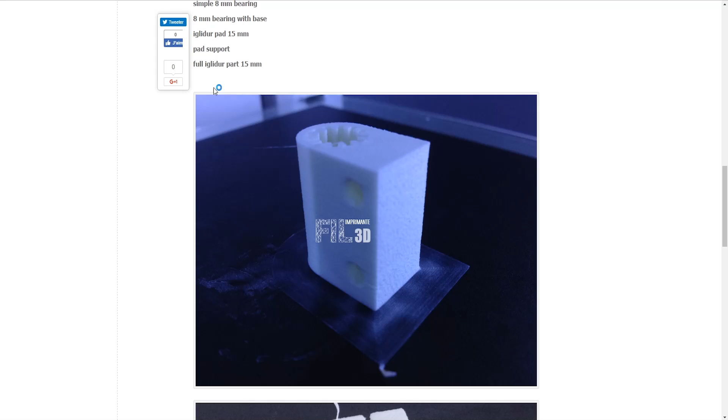They have excellent wear behavior, and most of the time when you print these, you're going to be printing at 220 to 250C, bed 110C. So generally around here, this one's giving in Fahrenheit, you'll probably be more familiar with Celsius. So excellent wear behavior, most of them do have that. Hard to process, outstanding wear behavior of the tribo filaments.

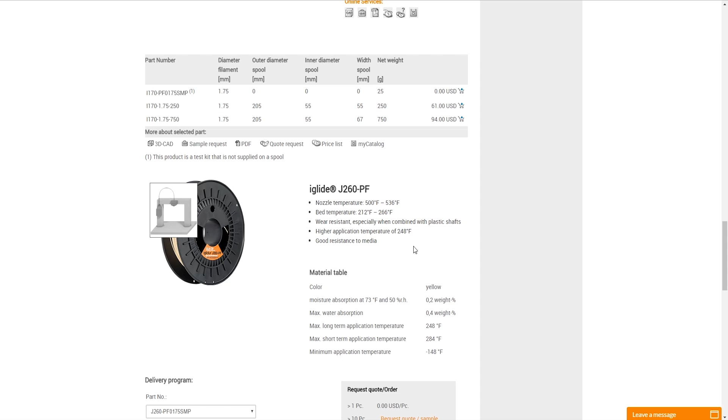Then you have good media resistance, the J260PF, nozzle temperature quite a bit higher. So this one's like an additional 54 Fahrenheit, which is like 10 to 20 Celsius increase. So this one might be harder to do. Bed temperature also very hot, 266, probably not going to be able to hit that with most beds. Great wear resistance, especially when combined with plastic shafts, higher service temperature that you could run it in.

So those are the few that they have. They have three, like I said, I have the 180, and this one I believe is the newer one. Okay, so I was not able to find the actual mechanical properties, well, I found two here on this page. I was not able to find maximum strain. I was also not able to find the stiffness.

But on this page, you can see that the flexural modulus is 1,000 megapascals, and the flexural strength is 44 megapascals. So if you guys were here from my last video on Taulman 3D, their nylon lineup of filaments, this one falls between PCTPE and nylon 645. It's almost got the same properties as nylon 645.

And also that I was not able to find a comparison between this and nylon. So I'm not completely sure how well this is more smoother than nylon, lower wear resistance. But I'm thinking that this is some sort of nylon. It's probably some sort of type of nylon.

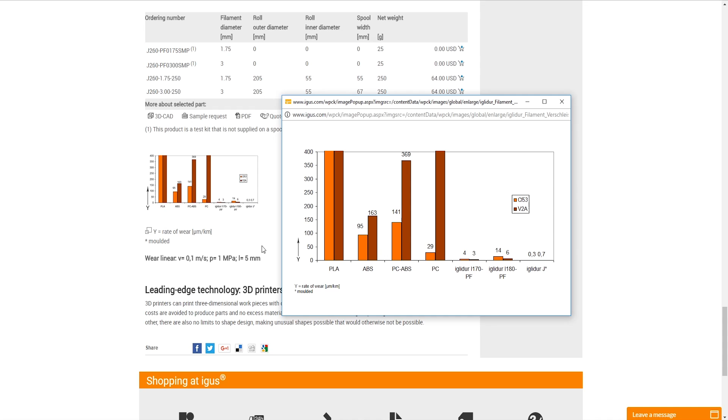There's a bushing, and there's another piece inside the bushing. So that's the linear test. You're on this one. So that's the test, just back and forth over and over again. So maximum travel, 5 millimeters back and forth over and over again.

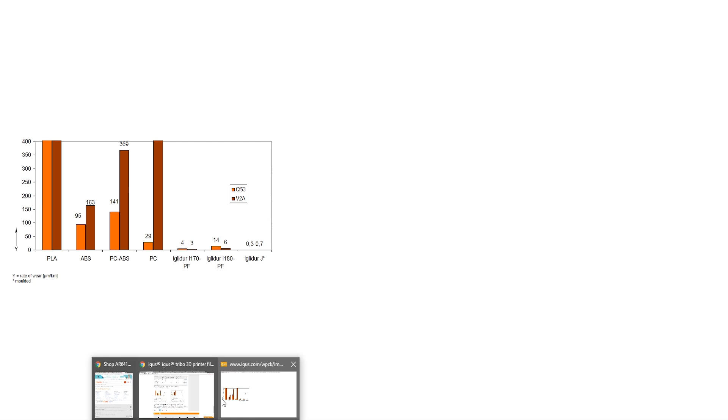So here the Y is the rate of wear, and this is picometers, so 10 to the 6th. Yeah, sorry, micrometers. Picometers are 10 to the negative 12. Micrometers are 10 to the negative 6 meters. So basically what this is saying is 10 to the negative 6 meters for every kilometer of travel.

So a kilometer is 1,000 meters, and each meter is about 3.3 feet, I believe. So that's 3,300 feet, like 2/3 of a mile. So for every 2/3 of a mile, the shaft will wear 10 to the negative 6 meters inwards. So if you have that sleeve going up and down, every kilometer it will wear 10 to the negative 6 times whatever number it's on this graph.

So for example, here PLA is at 400. So for every kilometer, or 3,300 feet, it's going to wear one micrometer, which is 10 to the negative 6 meters.

So there are two things here. You have the CF53 and the V2A. Those two are chromoly steels, or rust-proof steels. So those are steels used for linear rods, pretty much. Those are two different steels, so they're two different tests with the different steels that they're riding on.

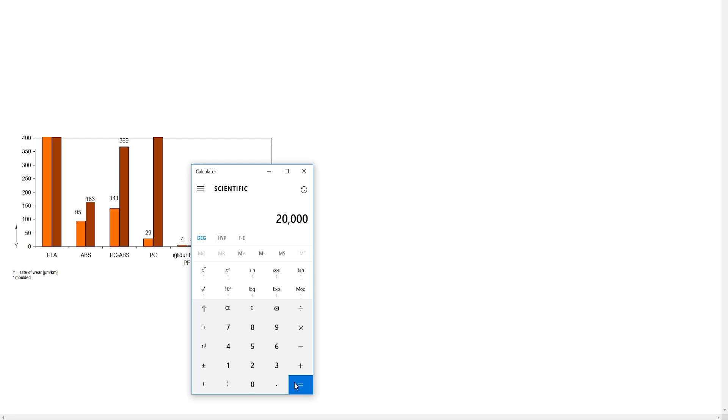That's 10,000 feet. So let's just say 10,000 feet. In each print, let's just say you have a half foot build length. So let's just say that's a 3D printer. It's 6 inches of length, right? Which is half a foot, 12 inches per foot. That's a total of 20,000 travels back and forth. So that's not quite a bit, especially on a 3D printer where you're doing a lot. So 20,000 travels.

Oops. Closed. So let's look at ABS. And so of course on this graph, the lower it is on the graph, the better off you are on the wear. So you want to be towards the bottom. ABS, we're looking at 95. So 95 compared to 400, so this was 3 kilometers. And then this is divided by 4, so that is 12.

So a little bit over 12 kilometers on the CF53, and this one is higher on the V2A steel. So instead of 3, that is 2.5, so that's around 7.5 kilometers. So let's say that if you use the CF53, this is times 4. So that's 80,000 passes on a 6-inch rod. Quite very, very good.

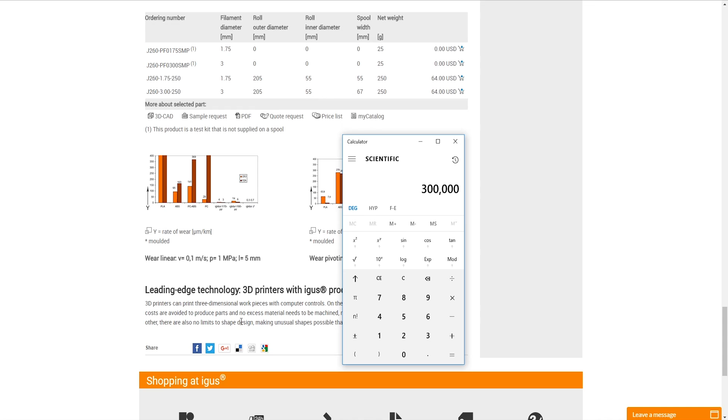So you see a difference between the PLA, which is 20,000 passes, and the polycarbonate, which is 300,000 passes. 300,000 complete movements. So right there, the lifetime just goes through the roof. So basically the 3D printer is going to break or be obsolete before this bushing goes bad, which is what you want. You want the machine to last until you don't use it anymore. Then we get, oh, I did it again. Put it back up. Then you have, of course, the V2A, which is off the chart.

Now we have the 3D printed material, the iglidur, which is the I170 PF. I have the 180, the next one, as you can see, is a little bit higher. So the 170 is the low friction in the linear, so that's probably the one that you want. And then the iglidur J series, which in this case is the molded one, not the 3D printed one. And we have 4. So this is 100 times, right? 100 times.

So you're talking about 2 million passes compared to PLA, right? So no other plastic 3D printed bushing is going to compare to this, unless, you know, polycarbonate is going to get close, and polycarbonate ABS mix. It's kind of funny because it seems like the ABS messes up the polycarbonate as far as that's concerned. That's kind of weird. But yeah, so nothing that you're going to be able to 3D print is going to be able to compare with that 170, because that's 2 million passes compared to 20,000 passes.

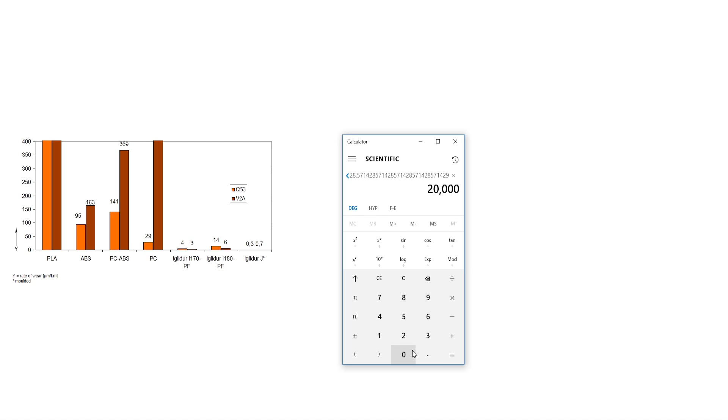And then if you use V2A, that's even more. It's probably like 3 million passes. The 180 that I have is not nearly as good. It's 571,000 passes, so that's pretty good. So the iglidur 170 compared to the 180, this one has almost 4 times the wear resistance.

And then here, this is twice. And then of course, as you see, molded is just like a fraction of that, very, very small. So it's 4 times 4 again, that's 16 times. So this is 16 times more wear resistant than this one. So incredibly wear resistant out of a 3D printed part, right? So this is insane, because the 170 and the 180 are designed for 3D printing, I believe.

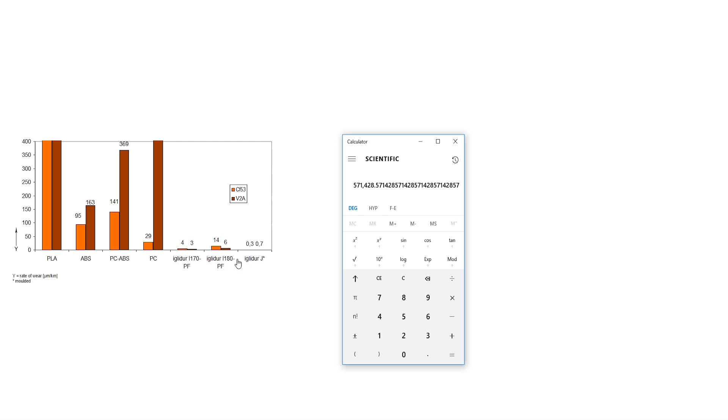The J series is what they use internally. So those two are 3D printed materials, tested. Because I believe they don't make anything that they sell out of their store out of this. They make it out of the J series. So this is completely 3D printed, just whooping everything else as far as wear resistance goes.

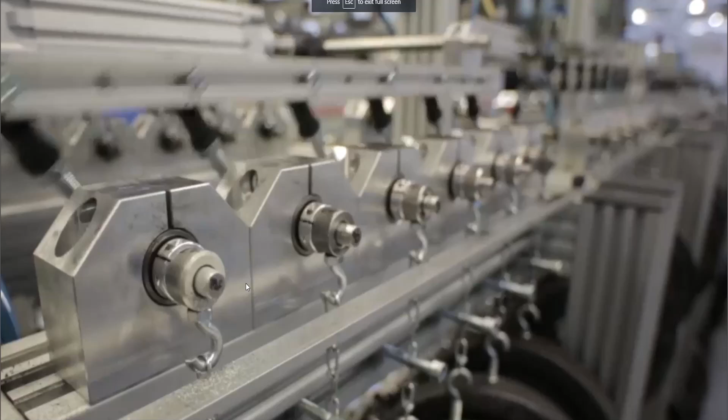And then here we're looking at the wear pivot. Here's the pivot. So again, these are those little arms. Oh, here's the bushing in here. So there's the bushing. Let's look at it really quickly. PLA, low wear resistance in pivot, very interesting. And this is again per kilometer.

Oh, I forgot to go over the test. So 0.01 meters per second. I'm pretty sure that this is angular speed. 1 megapascal and 60 degrees of rotation, beta. I don't know why they didn't use alpha or theta, but they used beta. I'm gonna assume that that's just the 60 degrees of rotation on that pivot test.

All right, so we're looking at 63.9, 7.4 for PLA. Very, very good for PLA out of the bat. ABS, quite a bit higher. Again, this is an identical graph as far as it's set up. V2A and CF53. ABS, quite a bit more wear. Polycarbonate ABS, huge wear on the CF53 material, lower.

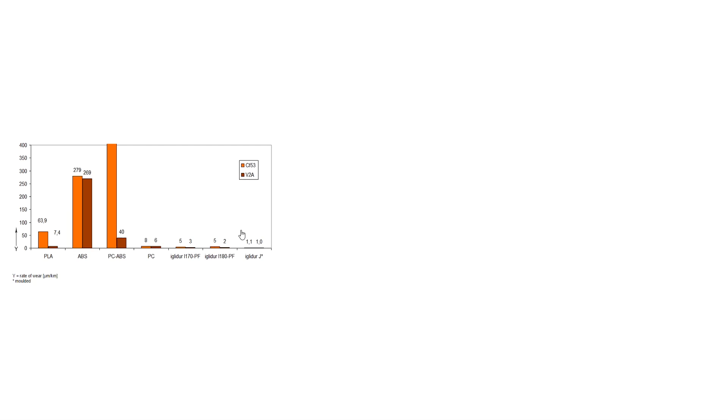Polycarbonate, extremely low. And you see here, iglidur is not really going to beat out polycarbonate very well. So this is kind of where it seems to be falling on its face. But iglidur J is 8 times better than polycarbonate. But again, it's got the star, which means it's molded. So it's a molded plastic.

So this is what Igus uses internally, but now they're starting to create this outside with the J series that we saw, the last filament at the bottom, the 260 or whatever it was. So I don't know if we're going to be able to get this type of performance, but these are the two we're looking at right now. 5, so just a little bit better, and then this is twice as good, and then this is 3 times as good as polycarbonate. So still very, very good.

But where you're going to see the benefits is in the linear rather than the rotational. So the rotational is showing that you might as well go with PLA, because I've seen some things where PLA gears have outlasted ABS gears quite easily. So I'm seeing that here.

And then way better. So this is what, 4 times. So it's 4 times less friction than ABS, and then this is of course against steel. Alright, so here, iglidur not as good, quite a bit better than PLA, and then of course polycarbonate and polycarbonate ABS mix are quite rare plastics.

So it's very, very good. Alright, those are the main 2. I just want to show you guys some prints of what those particular ones would look like. So here's a bushing, like I said, with the little fingers, and then some mounting holes for bolts, and then a linear rod would go through there.

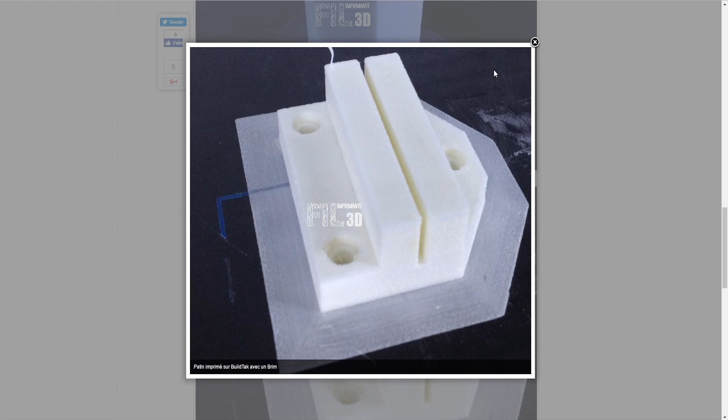And then here is the brim to keep the edges from lifting and add better adhesion to the bed. And you see both are printed with a brim. And then here, maybe like a belt. Maybe a belt goes in there, or something slides in and out. But again, with a brim. Very, very nice print.

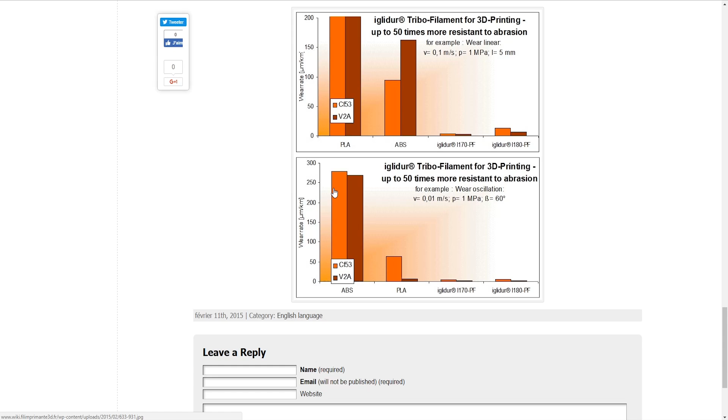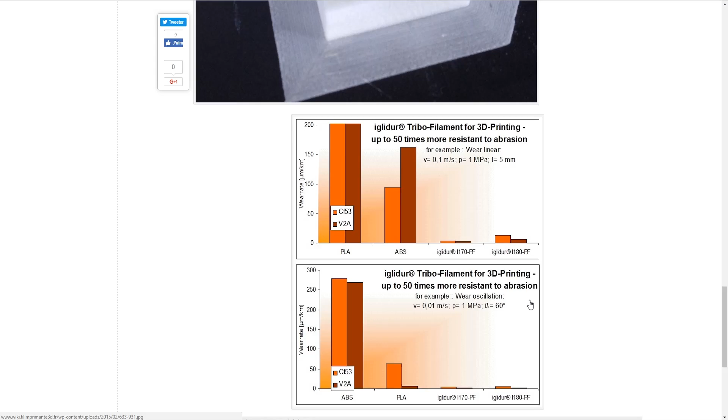And then here's a bigger version, expanded version. Oh, and then this is oscillation. So this is another one. ABS quite a bit higher than PLA. It's linear wear oscillation. So yeah, this is that other one that we're looking at. So same identical one. All right, so let's talk a little bit more.

Yeah, so hardened chrome CF53, load 15 megapascals, swivel angle 60. So here's like some of their bushings. Oh, here we go. Yeah, so it says bending E modulus, tensile strength. So yeah, they don't really tell you how much they flex. Anyways, here's another one. So we'll go over just a few more tests.

So here again, here's some more bushings. ABS bushing, iglidur I180, and iglidur J. And then this is molded. This is an actual printed one, and these are both printed. So here's a linear test, very long stroke. Surface pressure, 0.11, so this is basically atmospheric pressure, 100 kilopascal. Surface speed, 0.34 meters per second.

Stroke is 0.370 meters, which is basically around a foot, around 12 inches. Yeah, it's around a foot, so 12 inches. Duration, it went for 3 weeks. All right, so let's go ahead and take a look.

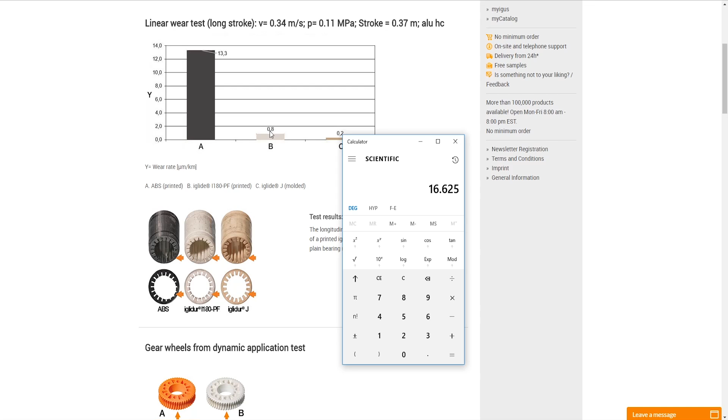Okay, ABS standard material considering wear when subject to a torque of 1.2 Newton meter over an operating time of 75 hours. In contrast to this, the printed iglidur I180 gear wheel shows hardly any wear, although subjected to a higher load over a longer period of time.

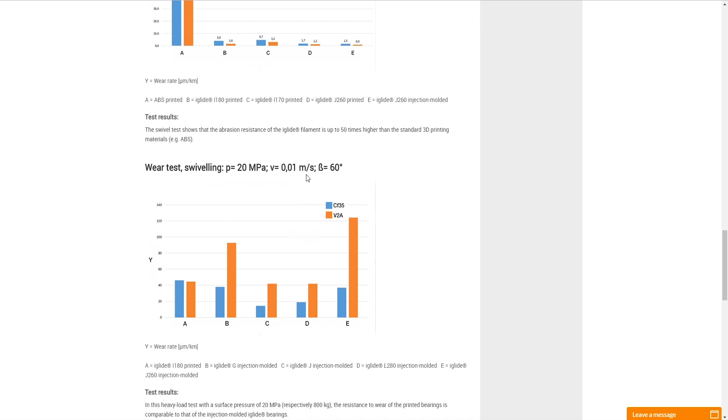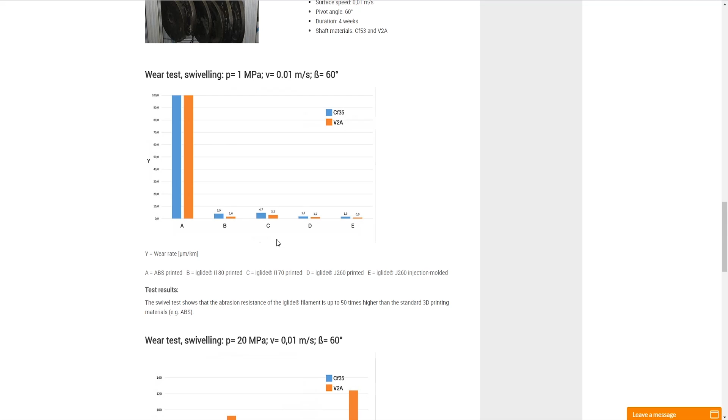Alright, swivel testing, 20 megapascals. So another one, but even higher pressure. So this is 1,400 pounds. Sorry, plus double. So this is 140, and then this is 1,400 times 2, so it's 2,800. So 2,800 psi.

Injection molded is quite a bit higher. Yeah, up to 50 times higher than the standard 3D printed material. So Iglide 180, and this is not even ABS, because ABS would probably break at that pressure. Okay, so here 40, so this is just showing the comparison. And they see that the E,

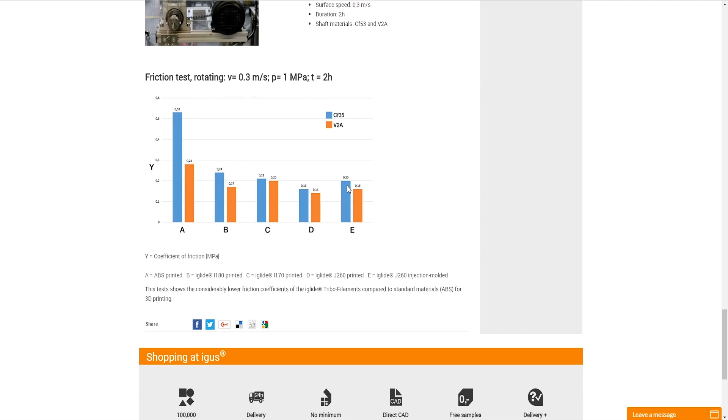so similar. Alright, friction test, rotating, this is the last one. Coefficient of friction: ABS, B, Iglide 180, 170, J260 printed, and J260 injection molded. So we see here 0.53, 0.24, so double the wear resistance, a little bit over double, a little less than 4, and it's actually higher here. So 0.3, 1 time 2 hours.

So this is just wearing. This is just like wearing something over it. So like you lock the shaft and then have it just run over it. So even just having something roll over it, not rotating or anything, you see that it still has quite a bit of low friction as it's lubricating the pieces. So very cool. So yeah, that's basically it.

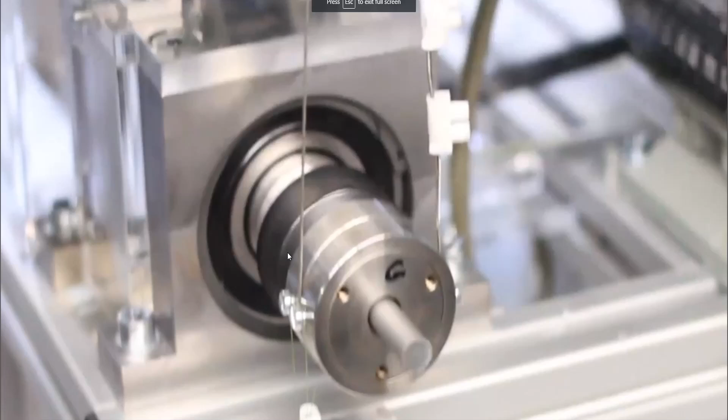Here's a few more tests. Here's the friction. Yeah, so it's just running a wire past, and then you have a tensioner there. And it's just running a wire past the pieces. Rotational. It's just rotating in a bearing, and the bushing being in there, beating on. Okay, so let's go ahead and talk really quickly about price.

So here, as you see from MatterHackers, Igus Iglide 180 PF Tribo Filament 1.75, and it is a 1/4 kilogram spool, $85. So a total spool is around $350 for a full kilogram spool. So you'd better be making quite a bit on selling this stuff. So let's go on to looking at the actual individual costs on the Igus website.

So we're looking at 250 grams, 59, 750 grams is 92. So obviously the good deal is to get the near kilogram, that's $92, which is an additional $30, and for an additional $30 you get 3 times the weight. So that's pretty good. And then this is the 180 that I have, and I got a free sample.

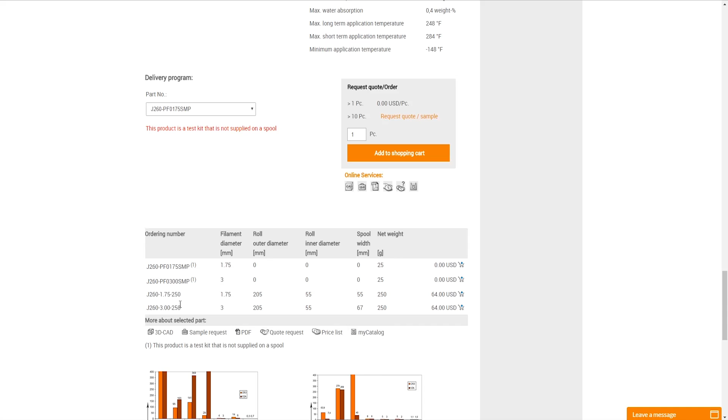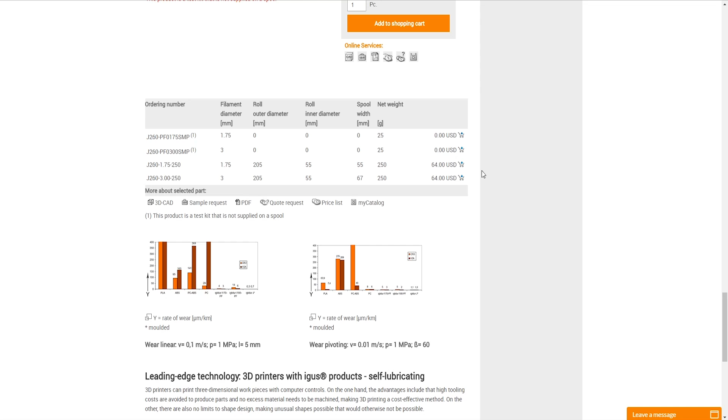And here this one's quite a bit more expensive, the J260, but it has the two different sizes here for a sample. The 170 actually is only available at 1.75. So here, 250 for $64. So 4 times that is about $250 a kilogram for the very, very low wear of the J260.

All right, so that's pretty much it for this video. I'm going to be testing out this Iglide 180 PF and see how that works, and I will be posting a video on that. But as you can see, very low friction, high wear resistance polymer from Igus for your 3D printer. And generally, as Igus says, if your 3D printer is able to print ABS and hit those temperatures, you shouldn't have any problem printing it and making custom bearings, bushings, or gears, or as you saw, wheel gears.

Go on to their website. They have a whole bunch of 3D CAD examples of different things that you can design. I will be testing this for the gear bearing and then seeing how that works compared to the nylons from Taulman and also PLA. Alright, well that's pretty much it for this video.